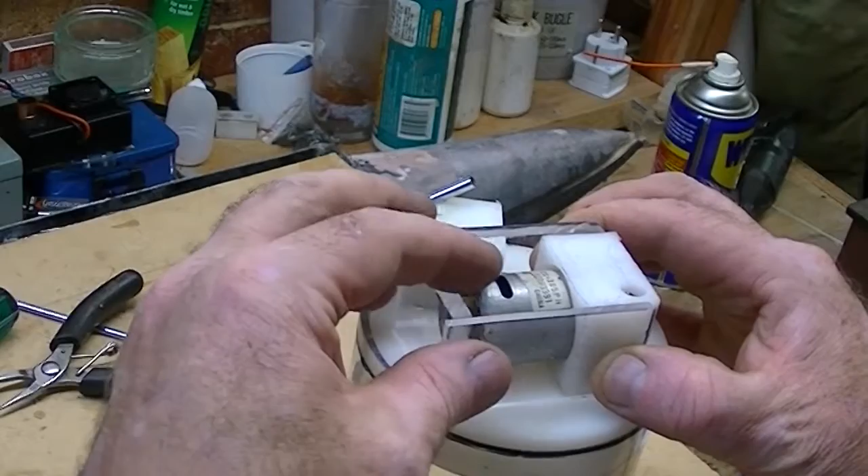Hi, this is a short project that I just need to do to fix the Nautilus because there's a problem with it. And the problem exists with my water pump, the pump that pumps water in and out of the ballast tank. I've made that and I've enclosed it in Perspex and it always leaks. And the reason it always leaks is because it's practically impossible to glue anything to that plastic. So I need to think of another way of doing it.

So I'm going to do a quick rebuild of the pump and I'm going to use a different method. I've got two previous videos on building these pumps, so I'm going to mark each one of them and say have a look at this one first, because I'm going to quickly go through with you what the process is. How do you build a pump? How do you make it two-way? How do you build an impeller? Real quick. You want to watch?

So the first thing that I've done is I've taken a drill and I've got an O-ring. This is a 3.5mm drill and this O-ring is a very nice, neat fit on there. That's my seal. I've also got this lovely plastic. It's 24mm thick, bought it at the plastic place, just off the shelf. Honestly, I'm using this for everything. It's bloody fantastic. So what I've done is I've cut a chunk of plastic, square, so that I can mount it to the back of the end cap.

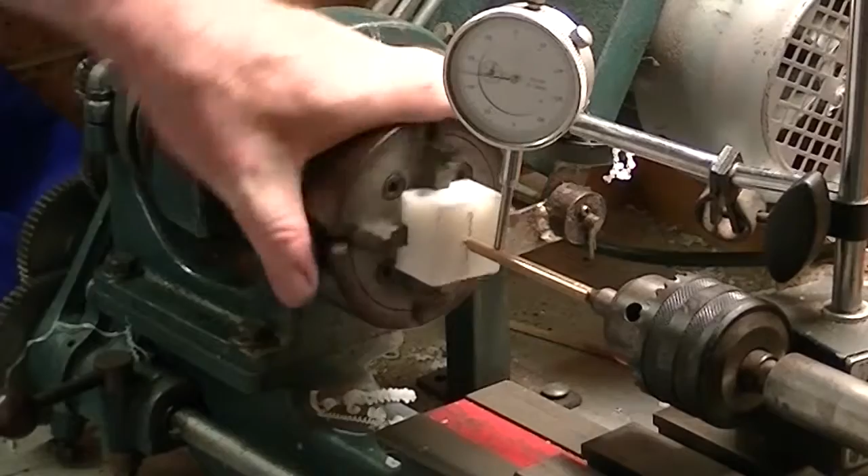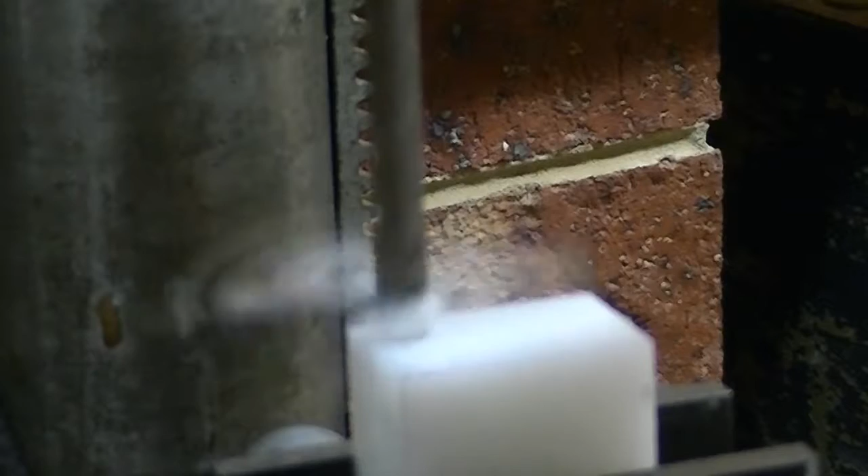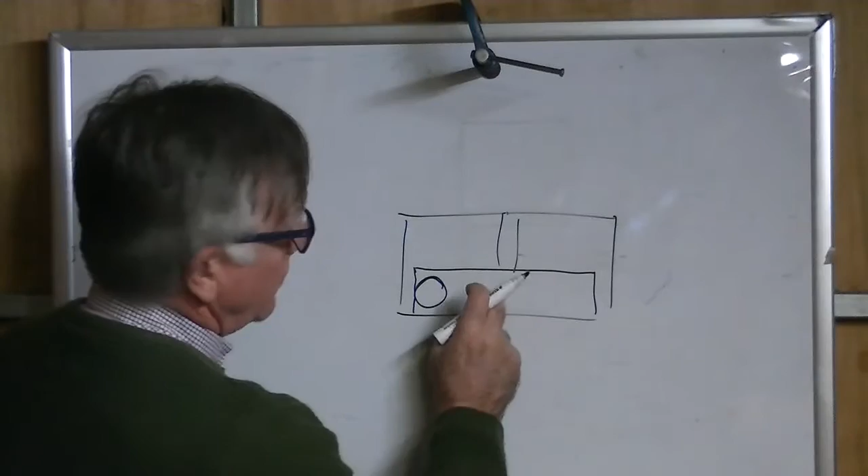And the first thing that I've done is I've drilled right through it, about 4mm, right through the centre. I've done that on purpose and I've made sure it's all nicely lined up. The next thing that I've done is to put it on its side and drill a hole here. I think it's about 8mm, and that's going to be the way the water's going to flow. And then I've machined out this section here round in the lathe, and I've managed to true it up to that hole, and you'll see that on the other videos. And this is where my little impeller is going to go.

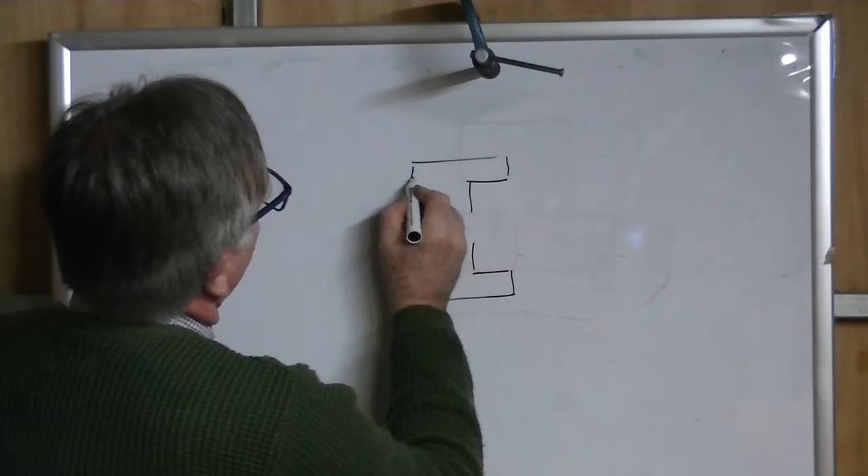So the next thing to do is that once I've got that done, on the other side I've now machined another hole. So on this side I've got the impeller, but on this side I want to fit the motor. Now the motor has on the front of it a little casing that comes out, so I've got a slot there to hold the casing. But then the other thing that I've done is I've machined another little slot to take the O-ring.

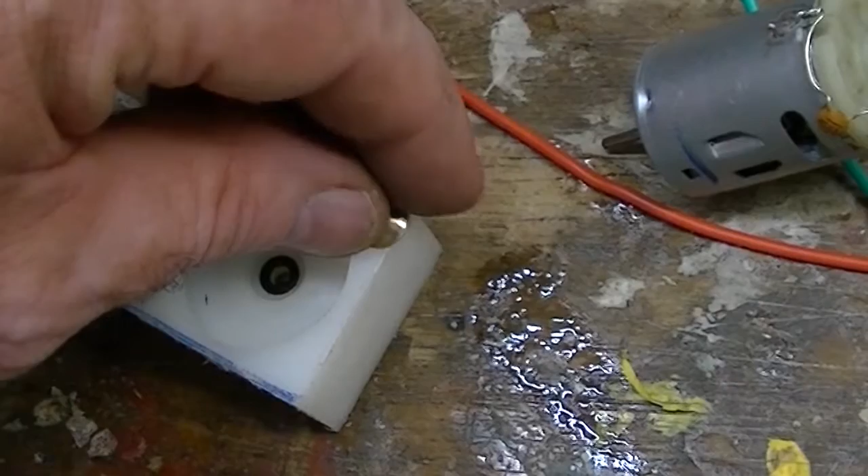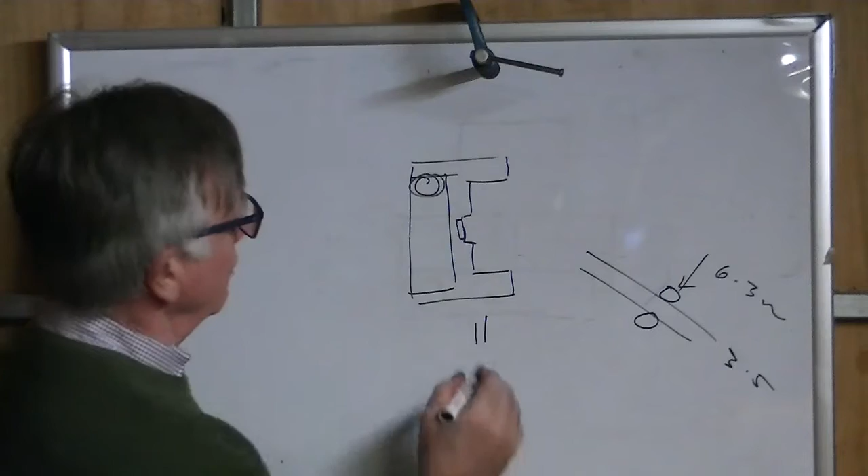Let's just look at that quickly. There's that 3.5mm drill, there's the O-ring. That slot is 6.3mm. But the width is less than the width of the O-ring, so it sits proud. Okay, so let's look at that a bit more closely. That's the area for the boss, for the motor. And in here now I've just got this little extra slot. And this is the tricky one.

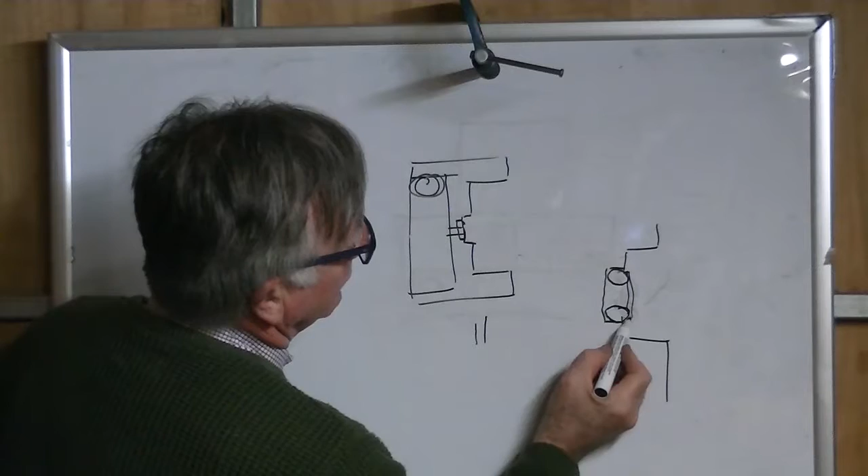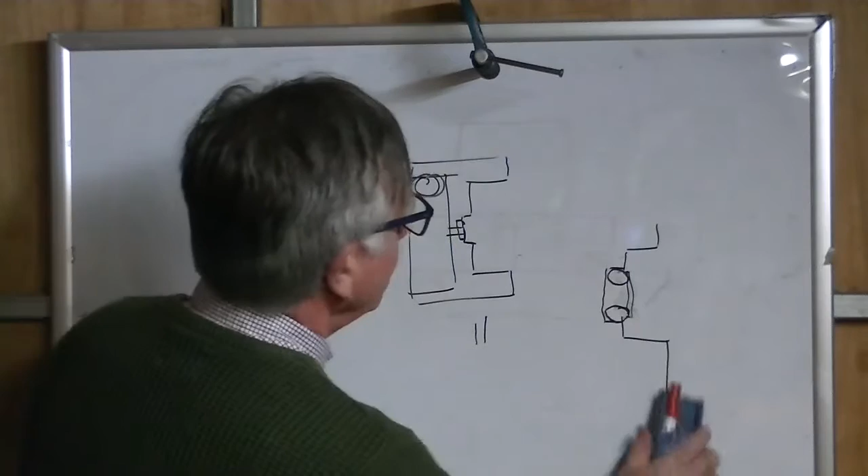I've machined it so that this O-ring will sit in there proud, so that when the boss of the motor, and I've actually just put a little washer in here, so that when that pushes up against it, it forces a seal, makes that even a little bit tighter, so that it's a very, very nice fit for the shaft. So the next thing to do is to take some care and then drill the holes which are going to mount the motor onto here.

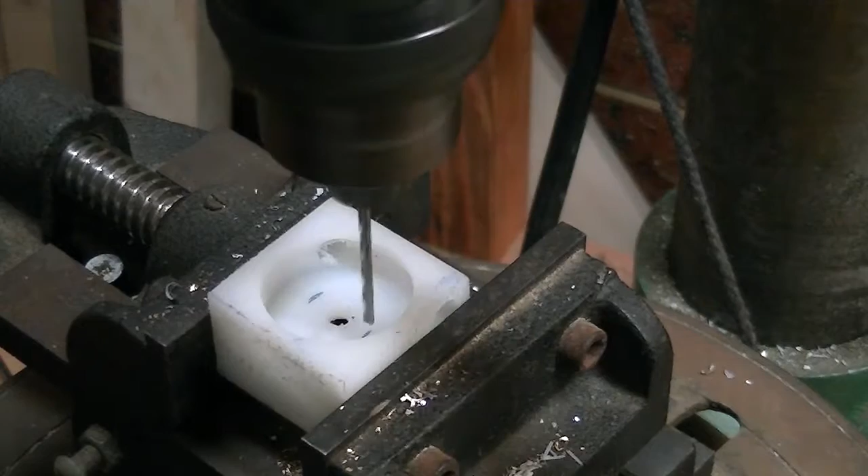That's how that's going to look. And now comes the new step. I've got here some nice PVC tube. This tube is 32 on the outside, 28 on the inside. Beautiful fit for a 360 motor. And these motors are worth, you know what, $10 or something from your electronic shop.

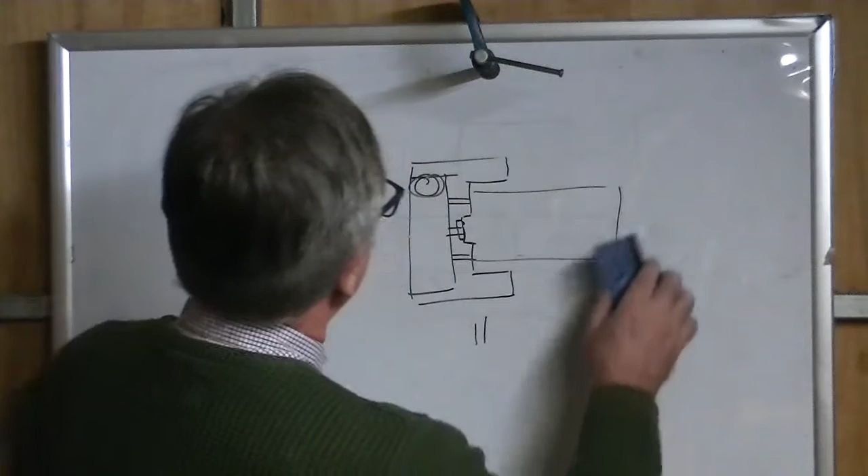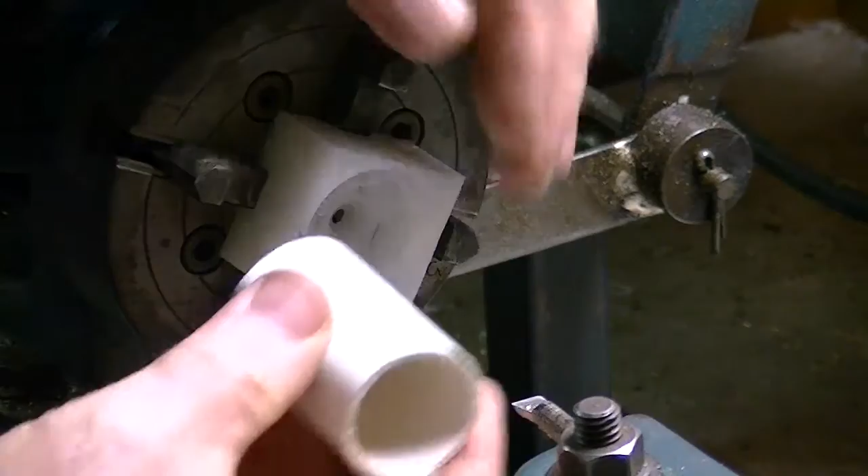So the next thing to do is to machine this out like that, so that it's a really nice sliding fit for that tube. Okay, so now we've built the object that's going to mount the motor, and the impeller is going to be mounted into here. So how do we build the impeller? Take a piece of brass, put it in the lathe. This is bigger than it needs to be. Drill it through with a drill that will fit the shaft of the motor.

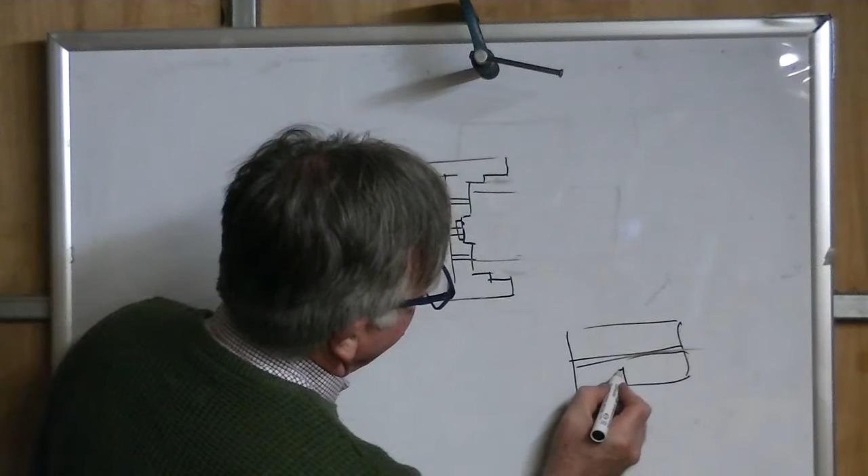The next thing to do is to turn this down here so that this now becomes, if you remember the size, 3.5 mil. And that is going to be nicely caught by that O-ring when I push it in. Okay? So, once I've done that and I've machined this, the next thing to do is to get a block of plastic again, put that in the lathe, turn down a boss for the impeller, and then bore this out.

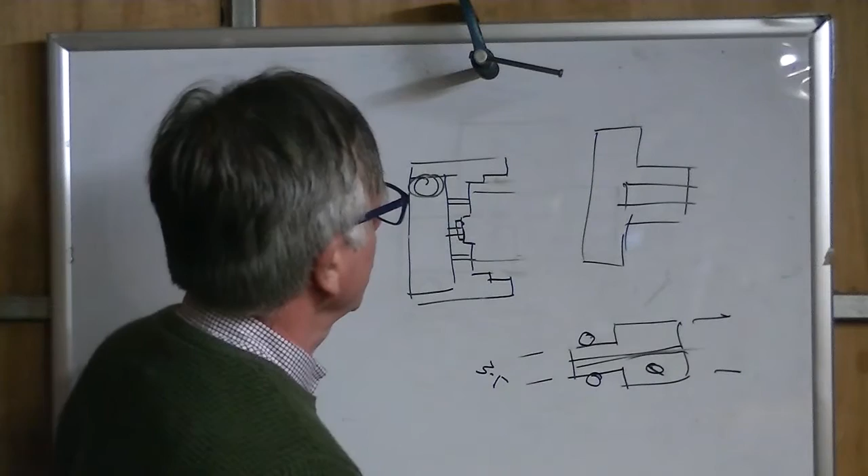And this is the tricky bit, because I want that to be an interference fit on here. I want to push this onto this end. And once I've done that, I'm going to drill a hole through and put a screw in there. So what I'm left with is this nice piece of brass with a hole in it, and then plastic around here.

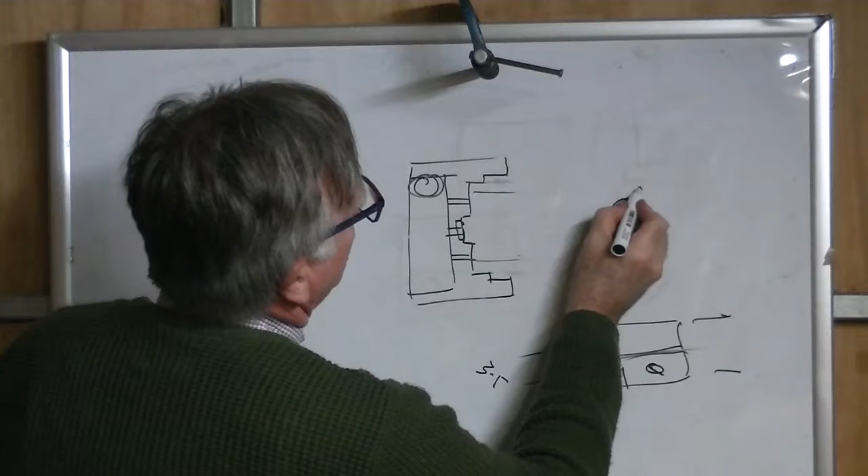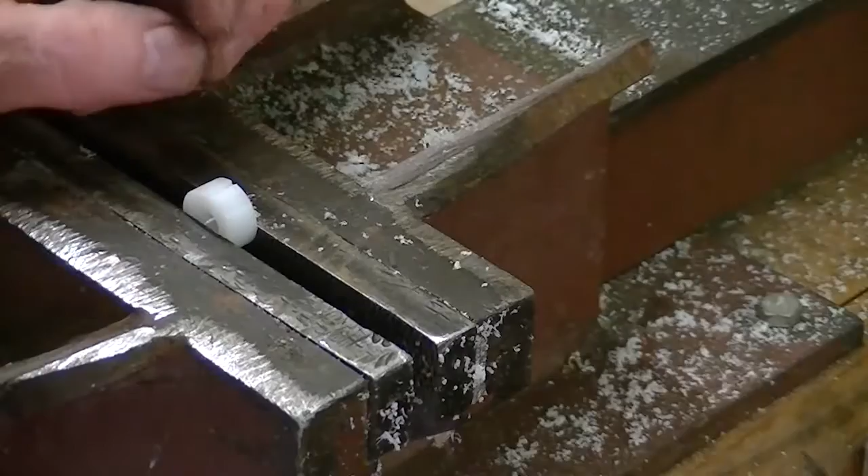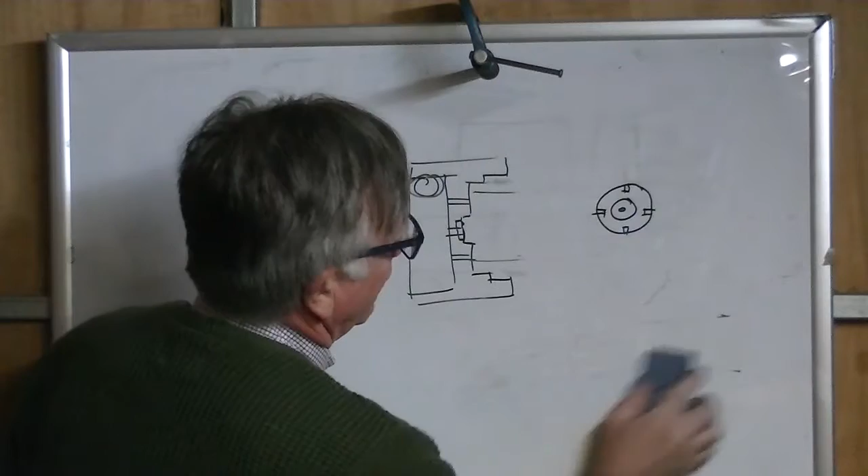I just get the saw and cut 4 slots in there by hand and use some nice glue and glue in some plastic impeller blades. It's done. The only thing I'll do at the end is just use the grinder to sort of get them all right. Okay, we've got that far. Now the final step is to get some more plastic and build the end cap for the top of the tube.

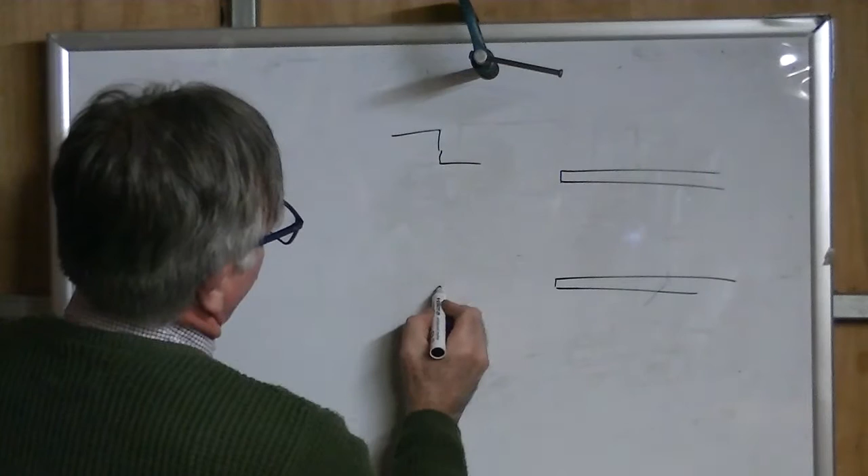And if you've seen me do this before, you'll know how I do end caps. If you've got a lathe, this is the best way to do it. You get a piece of plastic in your chuck, like that, and the first thing you do is you turn it down so that it's the same as the outside, just for it to look nice. Then you turn down this area here till you've got a really nice sliding fit. You don't want any play in it at all. In fact, it could even be a little bit tight.

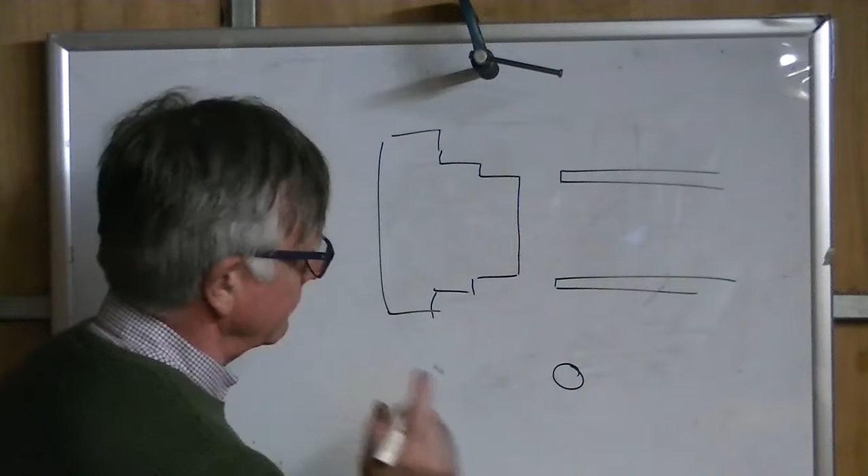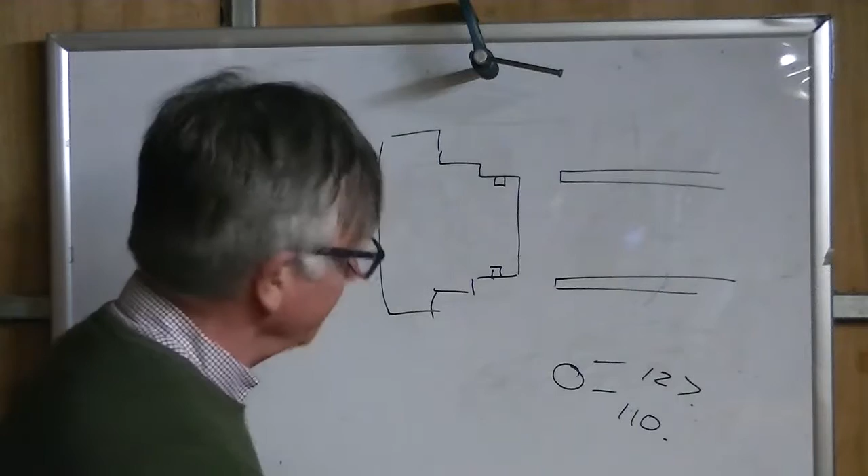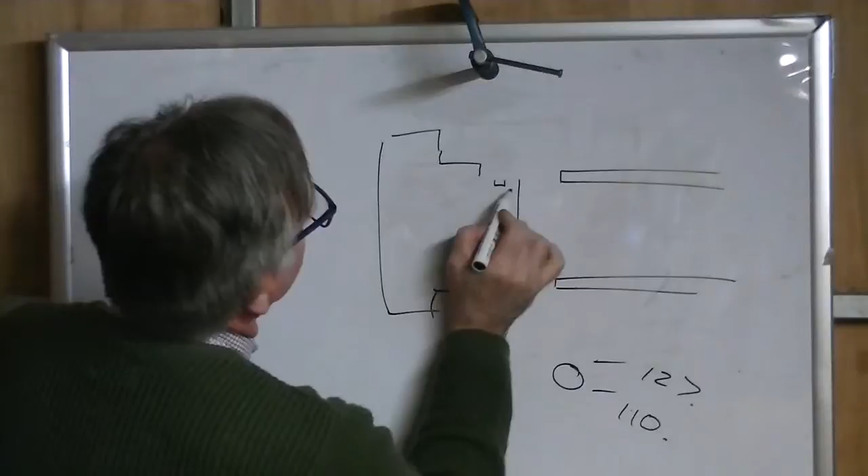Then you take your O-ring, and I found an O-ring which would just fit nicely inside there, and I think it was about 127 across. I want about 15% compression, so my slot that I'm going to put in here is going to be around about 110 deep. So I put a 110 deep slot into there, knowing that that is the perfect positioning, and then just take off 3 or 4 thou over the whole thing to make it all nice and loose. And then you've got a perfect fit. Cut that off. Done.